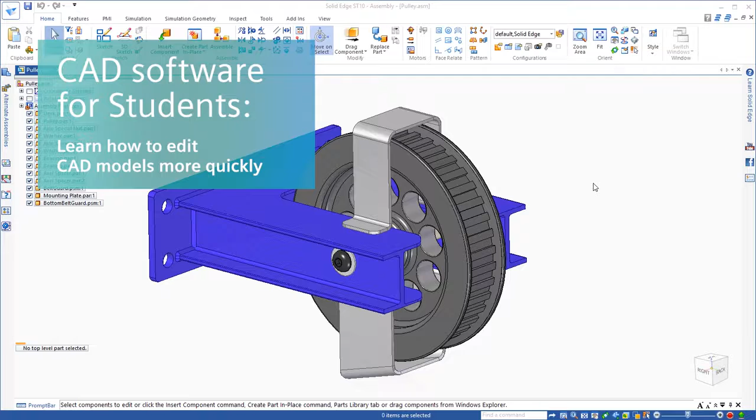I want to take a few minutes and show you some of the advantages of using Solid Edge with synchronous technology. Here we have a case where we have a pulley system, and I want to take this pulley and make it 20 millimeters wider to accept a wider belt.

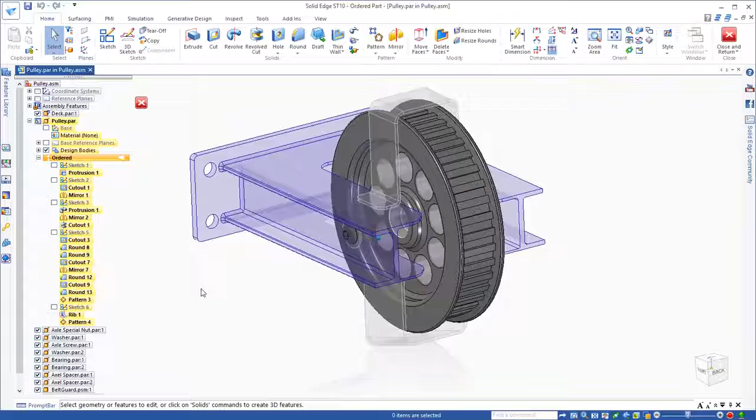So how you do this in Solid Edge is I would go in here and I would edit that part. You can see there it is in the context of the assembly. I'll go ahead and hide that. You can see that it has a seat for a bearing on either side. You can see there's a hole through the center for a shaft, a pattern of holes and a pattern of teeth around there. So let's make it 20 millimeters wider.

So if I look over here on the left in the feature tree, you can see that this is an ordered model, meaning this is history based, one feature on top of another feature. Being that I was not the person who designed this pulley, I have to first figure out what feature I need to edit to actually make this pulley wider. You can see that those faces highlight on the very first protrusion. So I'm going to go ahead and edit that feature.

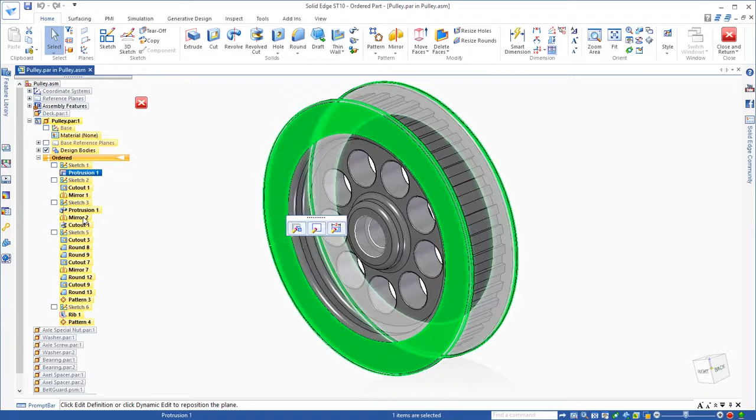You can see what it does is it rolls the model back, and this is how history-based modeling works. It rolls the model back to that particular feature. I can see there's a dimension here for the width. I'm going to change that by 20 millimeters, and then I'm going to click Finish. And I can see that now I have a problem. You can see some exclamation marks next to some features that have failed.

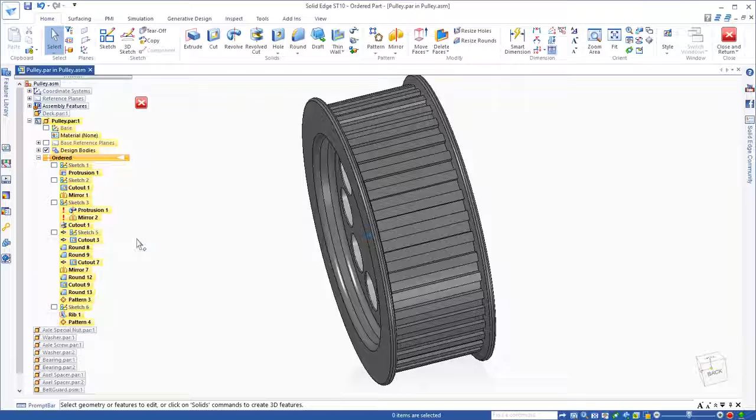There have been some dependencies that have been developed that we did not even anticipate. Whoever designed this part did not anticipate me making it 20 millimeters wider, and so those feature dependencies are causing me problems. And so now I've got to figure out how to fix the model. And this is the problem with history-based modeling. Very, very common problem. So I'm going to go ahead and undo that.

I'm going to go back to the original state, and I'm going to move this to the new technology that we have in Solid Edge called synchronous technology. So I move all of those features up to synchronous. Now that they're in synchronous, I no longer have those dependencies between features. Protrusion 1 could be clear at the bottom of the tree because, again, there is no dependency.

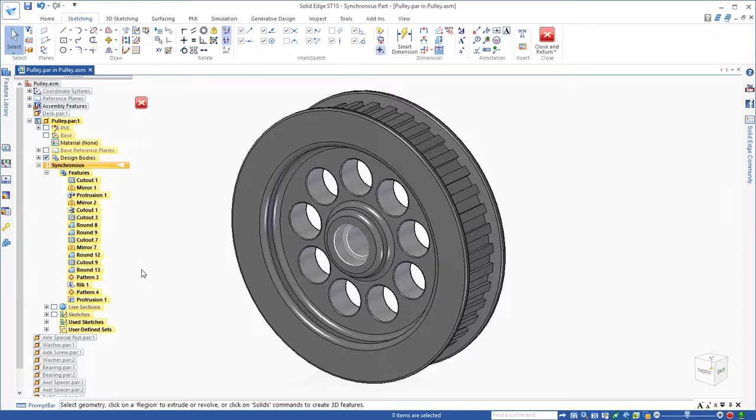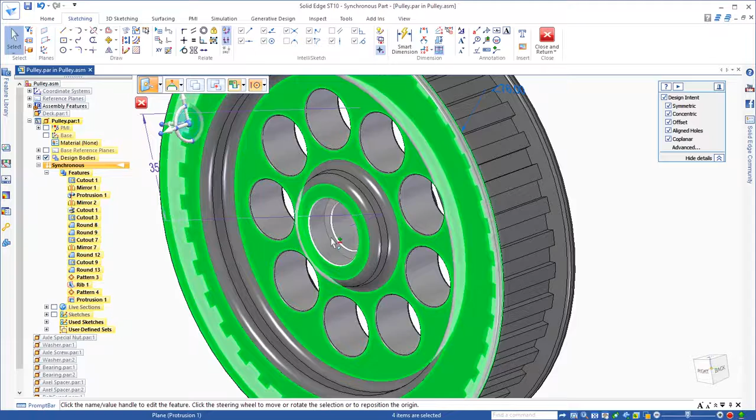So how you modify a part in synchronous technology is you select what you want to change. I know that I want this front face to move. I want the inside of the lip to also move with it. So I'll select that. I also want this hub to get wider. I want this part to get wider, and of course I want the seat for the bearing to move with any change that we make to the width.

So I simply select those things, I select the arrow in the direction that I want to move. You can see that as I begin to drag and make this wider, that it's staying symmetric. Because of the proprietary Design Intent Manager in the upper right corner of the screen, it's maintaining symmetry for me about the base coordinate system, which is great. So all I really have to move is 10 millimeters to get 20 millimeters wider.

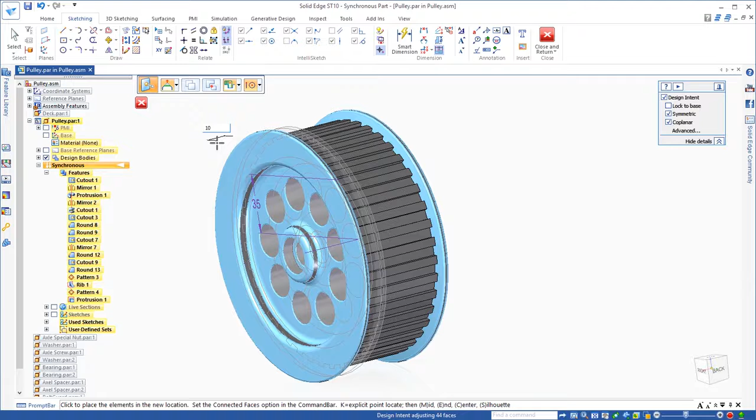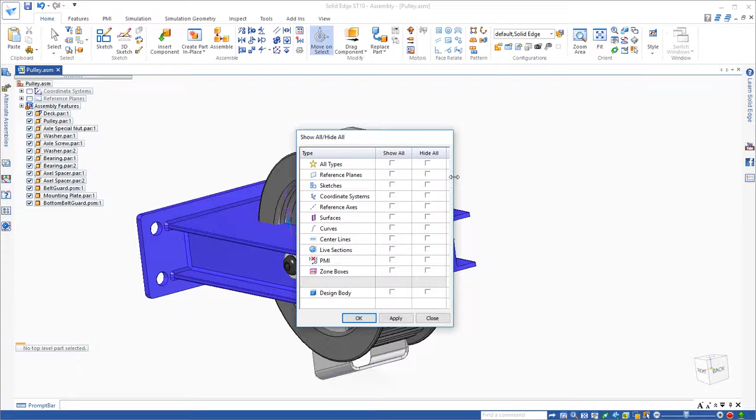So I no longer had to worry about what feature to edit, what sketch to edit. All I have to do is select the faces that I want to change and make the modification. Very, very quick and easy with synchronous technology. Let's go back to our assembly. And of course we can see that we have a little bit of a problem in that all of the parts are interfering with that wider pulley. It needs to accommodate the wider pulley with all of the other parts.

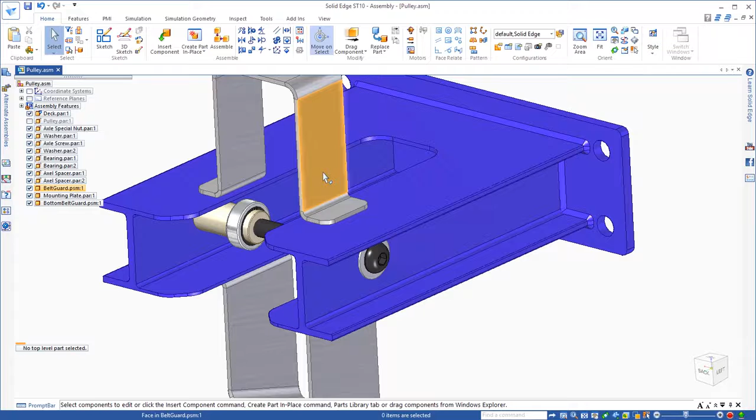So I'm going to go ahead and hide that pulley to start with. And another beautiful thing about synchronous technology is we have an option to actually select faces of parts at the assembly level. So in this case I'm going to come in here and I know that I need this to get wider. I also need the bottom sheet metal part to get wider. Notice I'm only selecting one face because it is sheet metal, it has a common thickness.

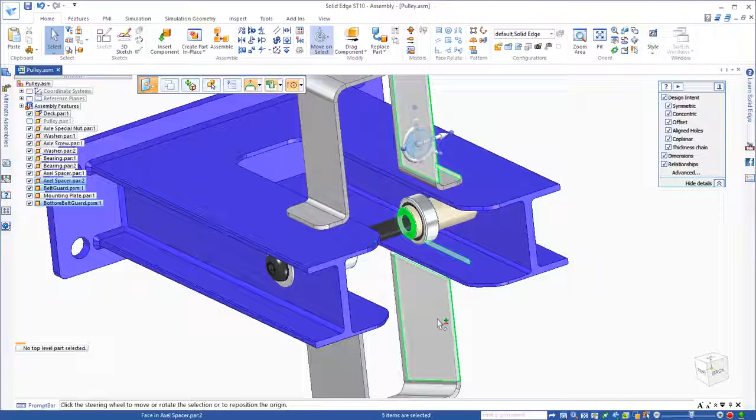The bearing moved correctly because it is seated inside of the pulley with an assembly relationship. However, the spacer needs to get shorter for the wider pulley. And the cutout in this girder needs to get wider. Now I'm only going to select one face because there is a coplanar face directly above it. And one of the things that it's looking for with the design intent relationships is coplanar. So it's going to find that for me.

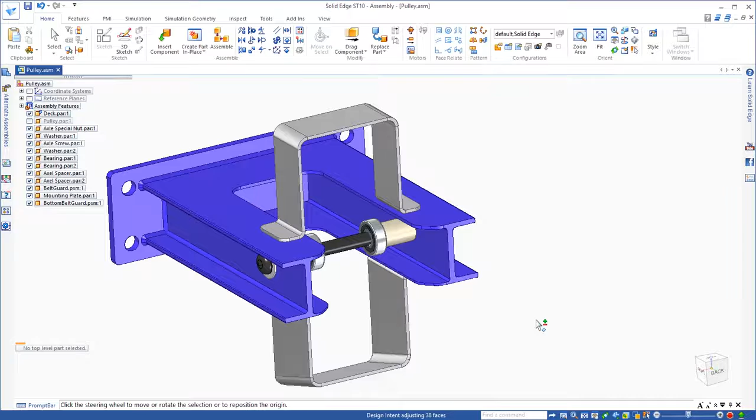So notice I'm at the assembly level. I've selected faces on multiple parts at the assembly level. And I can click on that arrow just like I did in the pulley and begin to drag to make it wider. And because all those parts are symmetric, that's being maintained for me. And again, I only have to move 10 millimeters. So if I turn on my pulley, you can see that everything is great. We have the clearances that we need.

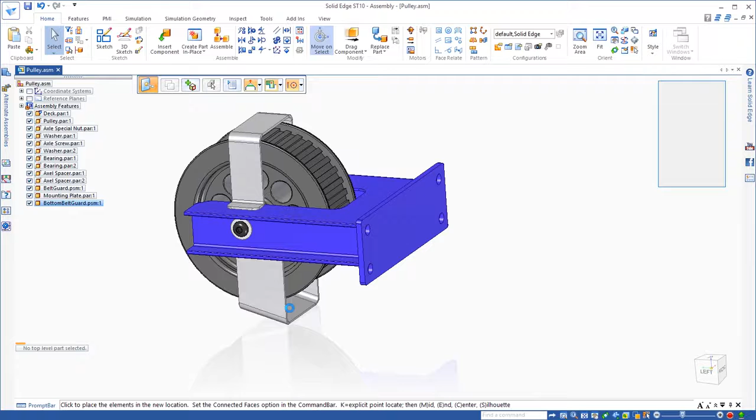So you can go into the parts and make changes if they are in fact synchronous parts. You can select faces directly from the assembly level and begin to modify those at the assembly level to change them in the part. Notice that the top sheet metal part is not as wide as the bottom, but I want them to be the same. Well, I don't want to have to measure how wide those are, so we have this option for face relationships at the assembly level.

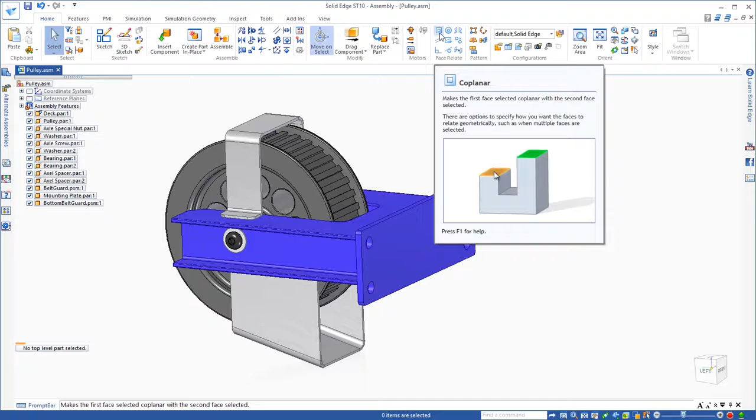I'm going to pick coplanar. We even have a little video that shows you what that means. I'm going to click on coplanar. I'm going to select one face of the sheet metal part. It recognizes it's sheet metal. Notice I want that all to come out to be coplanar with this part. And now they're the same width and I didn't even have to do any measuring.

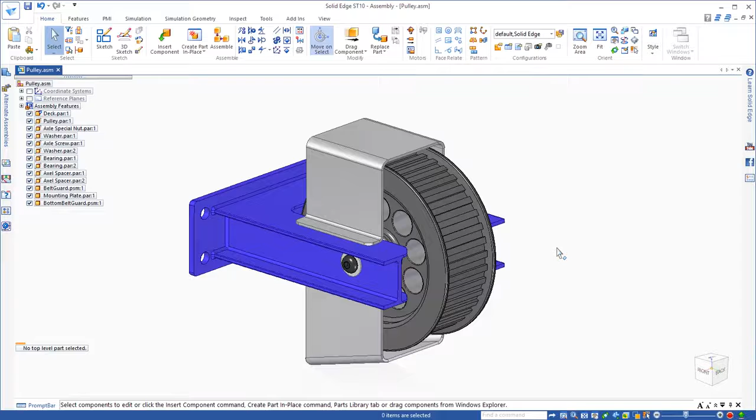So there you've seen some of the beauty of synchronous technology, in that you can modify parts without having to worry about history, and you can modify parts at the assembly level at the same time.